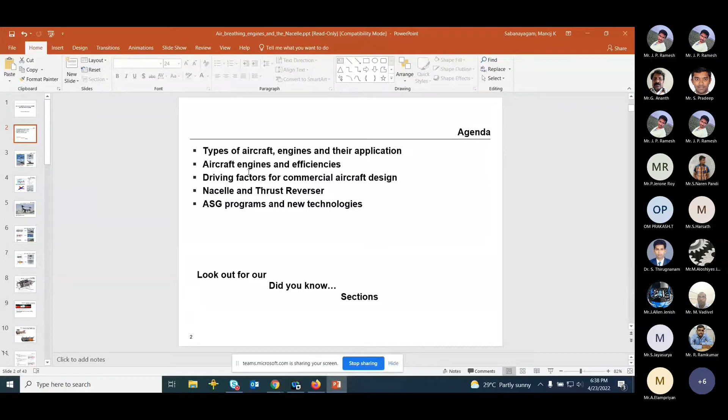Hello. Manoj Kumar, sir, please share your screen. I'm sharing, are you able to see it? Not share... screen is shared but not the slide. Not visible, sir, the PPT is not visible. Once again, share. Okay, now it's visible. Visible, sir, now the slide is visible. Thanks for the confirmation.

Before going into the session, I just want to understand, since you are a mechanical group, how much you are familiar with power plant propulsion systems and how they are covered in your coursework. I'm asking how much people are familiar with propulsion systems, what the power plant systems are, and how energy is extracted, so I can explain things better.

I'm asking how much people are familiar with propulsion systems and whatever has been done in the coursework about electrical systems and power plants, and how energy is derived. Actually, we don't have that propulsion systems course as of now, but we are familiar with power plants, various power plant operations, and related topics.

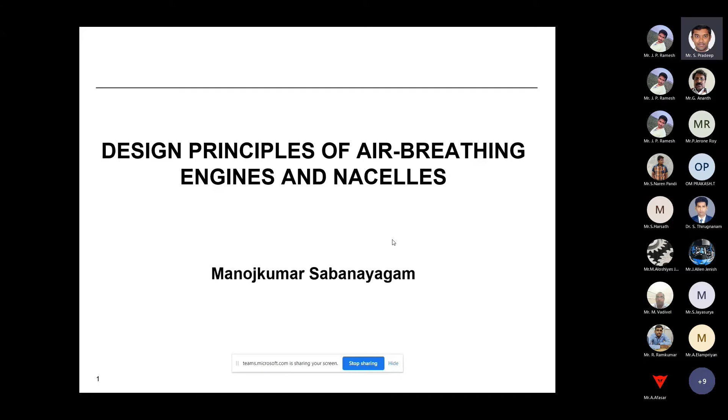Generally, what are the different types of aircraft engines and their applications? In this presentation we'll see the types of aircraft engines and their application, aircraft engines and efficiencies, and the main driving factors for commercial aircraft design. We'll also cover the nacelle and thrust reverser. The nacelle is a kind of cover or cowl to the engines, which also contributes to the thrust. And we'll look at the different technologies and different flight programs we have. So those are all the main topics we are going to cover.

So let's get started. These are the types of aircraft. Also, if anyone has any clarifications or doubts, you can stop anytime and ask for clarification.

We'll start it. There are generally two types, sir. Just a minute, sir. Your voice is a little buffered. Hello, are you able to hear now? Your voice is not clearly audible, there's a little buffer, but now it's okay.

Okay, there are generally two types of aircraft, what we see. It's not just an aircraft, you can say it's a kind of flying machine. How it has been determined is based on the propulsion system.

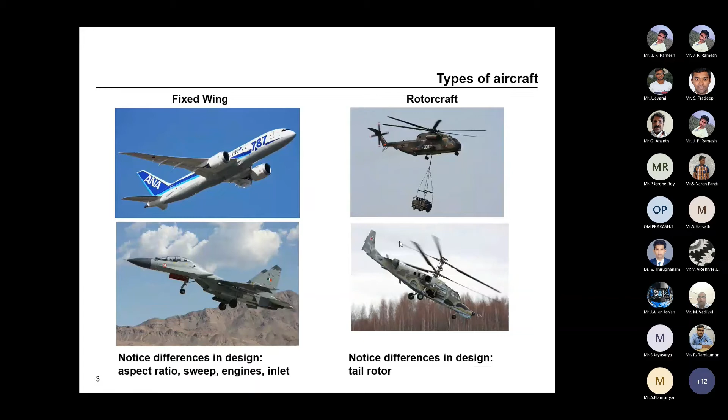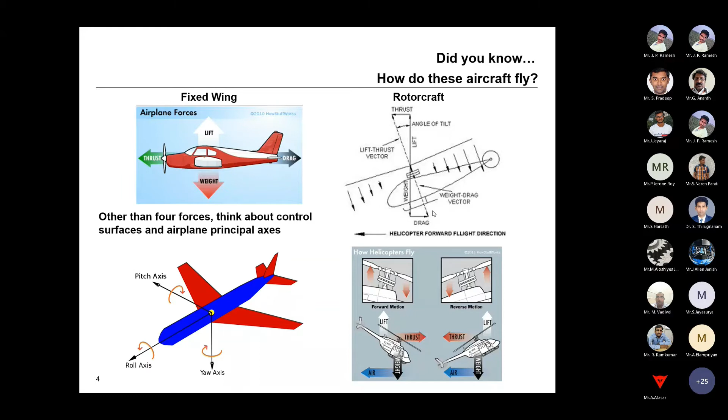These explanations are given just because you people are new to the aerospace industry, so you can have a good idea about how the motion of a flight happens. So this is how the motion is happening. Let me go to the next slide.

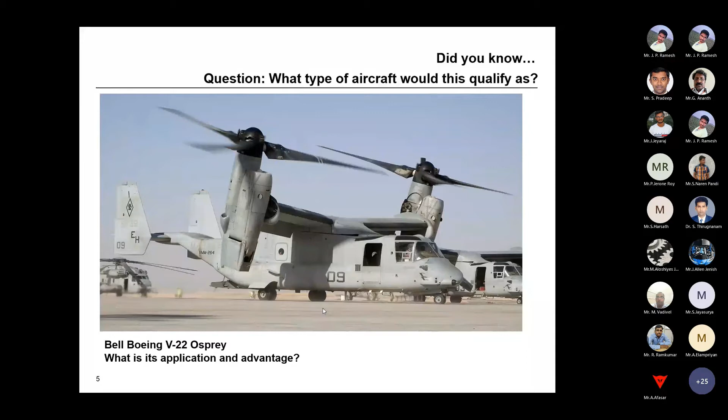So it's a combination of helicopter, rotorcraft, as well as fixed wing. That's the basic application, and it is used for military types or defense types. So going to the next slide.

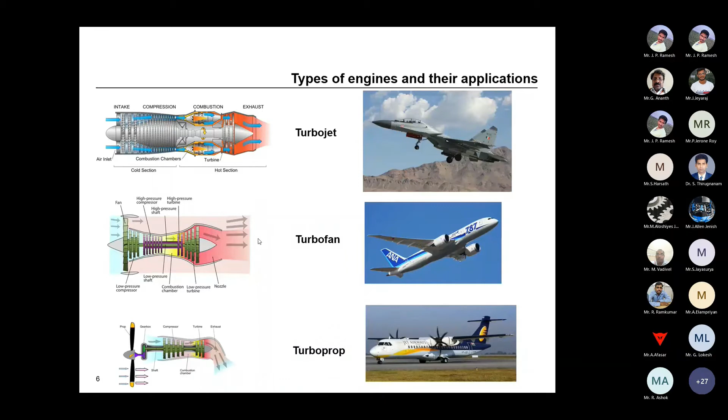So these are the basic types of engines what we see in our aircraft industry.

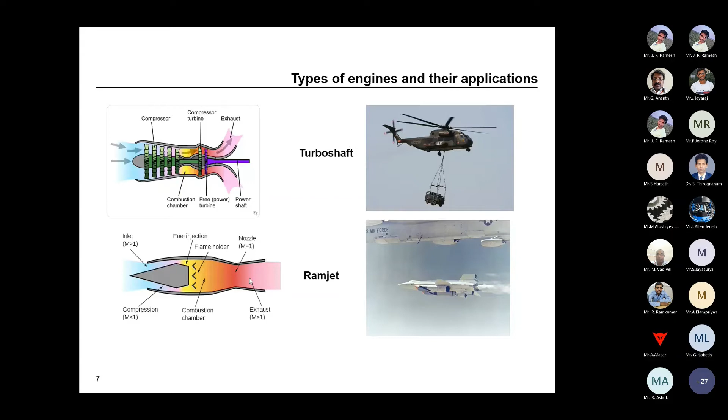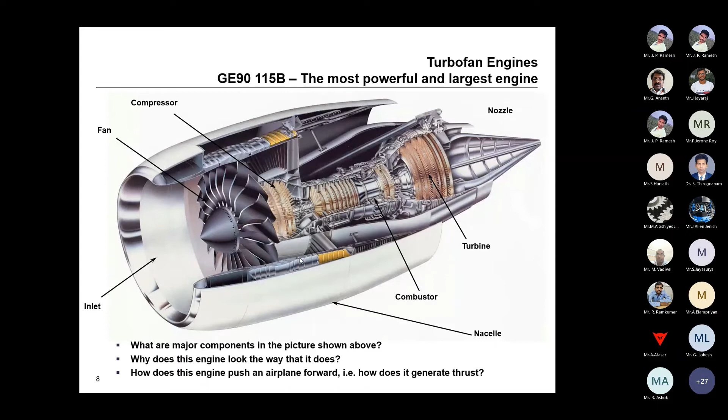These are some basic equations which you have gone through in your coursework: m dot, which is your mass flow rate, times exit velocity minus inlet velocity, plus the pressure difference into the area. I think this is the basic equation for how this propulsion device works.

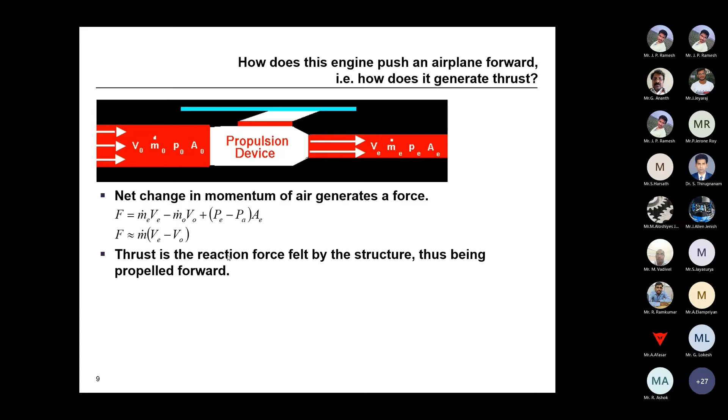Coming to the next slide, what is the major advantage between turbofan versus turbojet? In a turbojet, we increase thrust through the compressor, combustor and turbine, and after that we have an afterburner, which gives additional thrust. The fuel injection happens in the combustor, and again fuel is injected after the turbine blade, which further increases the thrust or velocity of the air passing from the nozzle. To get extra thrust, we have an afterburner device, which works on the same process as the combustor: fuel-air injection.

In bypass air flow, as I said before, there is a core air passing over here, and bypass air flows, and both mix at the nozzle end condition, giving enough thrust. So this is the basic difference between a turbojet and turbofan: the turbofan has a bypass flow, but the turbojet doesn't. Instead, to increase air velocity, the turbojet has an afterburner device coming after the turbine blades. That's the basic difference.

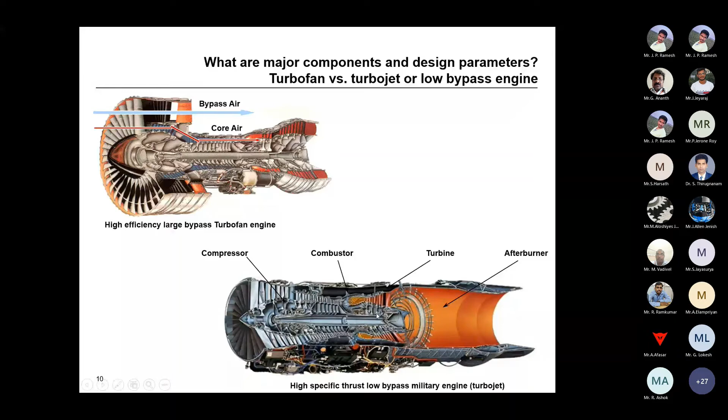Generally engines have three spools. What are spools? There are two-spool and three-spool engines. Basically, it's the shaft connecting the turbine blades and the compressor blades. When you have compressor blades and turbine blades, these two are connected with the shaft.

When you have intermediate stages: low pressure compressor, intermediate pressure compressor, high pressure compressor, and a combustor, and a high pressure turbine, intermediate pressure turbine and low pressure turbine — each is connected by one shaft, called a spool. So a spool or shaft connects each stage: LP compressor to LP turbine, IP compressor to intermediate pressure turbine, and high pressure compressor to high pressure turbine. These three spools adjust the velocity between the blades with high rotating speed.

Accordingly, we will have a higher efficiency in our thrust. So when you increase the stages of these blades with respect to the compressor blades and the turbine blades, we will have a higher efficiency. It will have an advantage of higher efficiency of the thrust to come in. So that's the basic idea behind adding more spools and shafts.

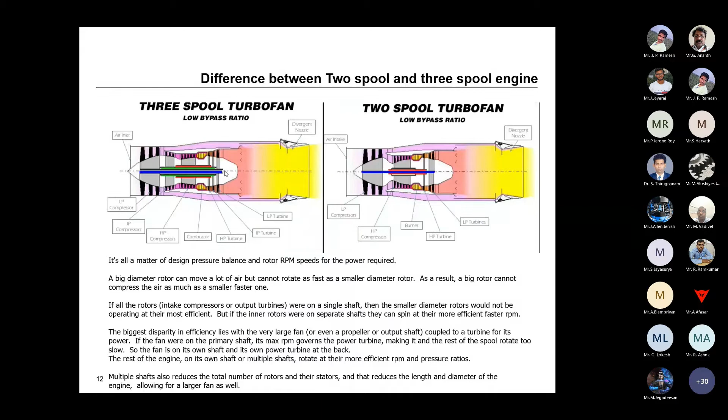So this is kind of like how the evolution of the engine takes place. It started with the first flight, the first commercial flight by the Boeing 707 - that's the first commercial flight in the market. At that time, it started with a thrust of 17,000 pounds. That's the starting point when they designed the engine, and the evolution took place.

This is the bypass ratio, beta, which is approximately 1 at that time, and the evolution took place. After so many years of evolution, by 2011, with optimized and increased technologies and design efficiencies, they were able to achieve around 74,000 pounds of thrust. So that's the increase in thrust achieved over the span of time from 1958 to 2011. And you see the bypass ratio is almost equivalent to 11. It's kind of great - because of new technologies and new inventions, this kind of evolution has happened.

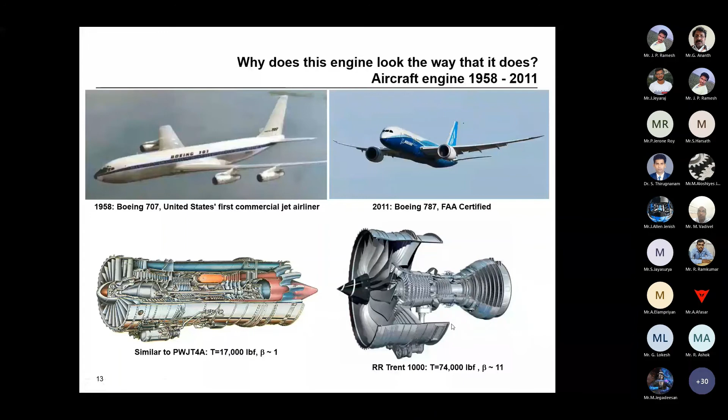Okay, coming to the next slide. So now if you see here, this is a GE CFM56 engine for a Boeing 737. The thrust is approximately 30,000 pounds, and you see the ratio for this flight.

And if you go to the defense aircraft side, what are the expectations for a fighter aircraft? They demand high thrust to weight ratio, and it should have high speed, and the engine should have a small inlet area. But here they should have a large inlet area because it's based on performance - based on how much speed the flight needs to achieve.

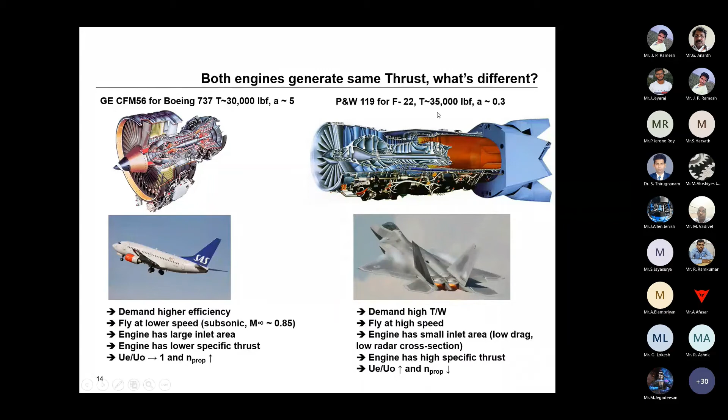And of course, if you see the thrust here, it is almost 35,000 pounds, and we have 30,000 pounds. So coming to the major components in the design parameters for the engines, one is the inlet.

So what is the inlet over here is the streamline. The inlet is a starting portion of this engine, which streamlines the airflow and continuously draws the air into the engine, so it should diffuse to the compressor. The air is diffused under the inlet portion, and then the second stage is the compressor or the fan.

So in the fan, the squeezed airflow will be compressed with respect to the turbofan, and then the compressor blades. So this is basically a compression zone where the compression is going to happen.

Then finally the next is the combustor, where the actual ignition happens. The combustion process converts energy from chemical to thermal energy, and relatively constant pressure is maintained over here.

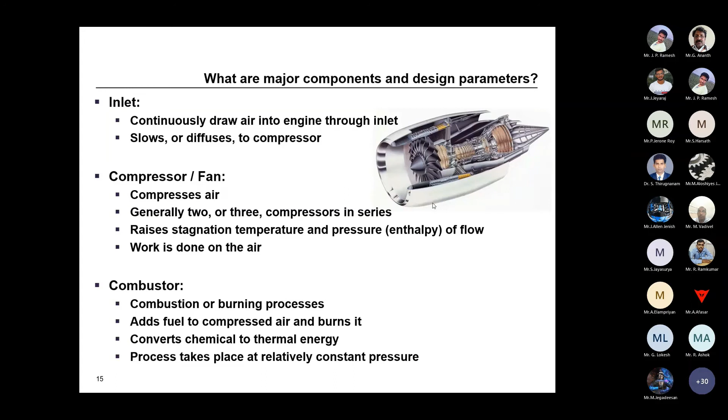And then finally the next stage is the turbine blades. There are 2 or 3 turbines in series, a lot of turbine blade series out there. The purpose of the turbine blades is basically twofold. One is it will drive the compressor blade, and second, it will also increase the velocity of the air which is driving after the turbine blades.

And then finally the nozzle. The function of the nozzle is to increase the momentum of the air, which raises the velocity of the exiting mass flow. So these are the basic stages of how an engine works.

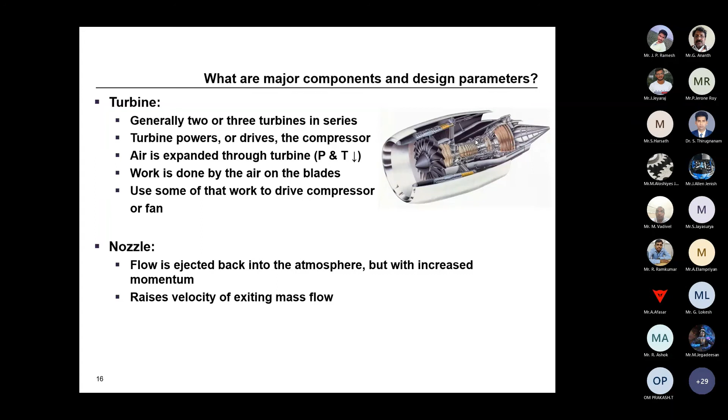So basically it's an air breathing engine, and the same principle is applicable even for the power plant products we see in energy production, whatever it is being derived. The difference is that the turbine blade, compressor, and turbine blade configuration is a little different. But overall, the requirement in design is almost the same for the aircraft and the power plant. So even this turbofan, what we see in flight engines, is also one kind of power plant that we have. So coming to the engine efficiencies, how do you calculate efficiencies?

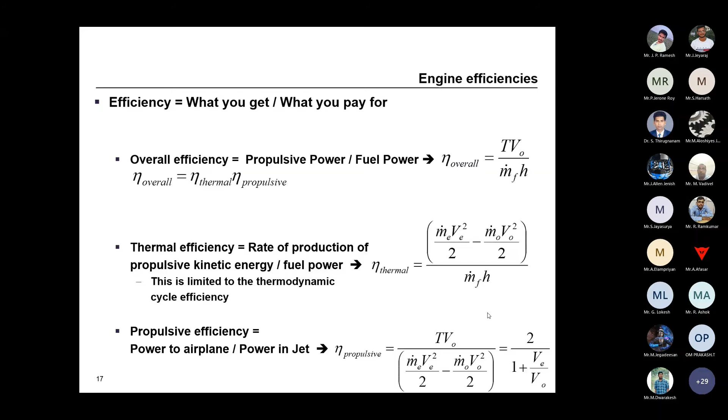So this is the basic graph between propulsion efficiency versus the force by mass flow rate. That's basic information on how it is going to vary.

And so, in the future, what we are going to achieve is ultra high bypass ratio engines with a very small core. So what is the future is we should have more bypass air, which will increase more thrust, ultra bypass. So that design is going to be coming in the future generation.

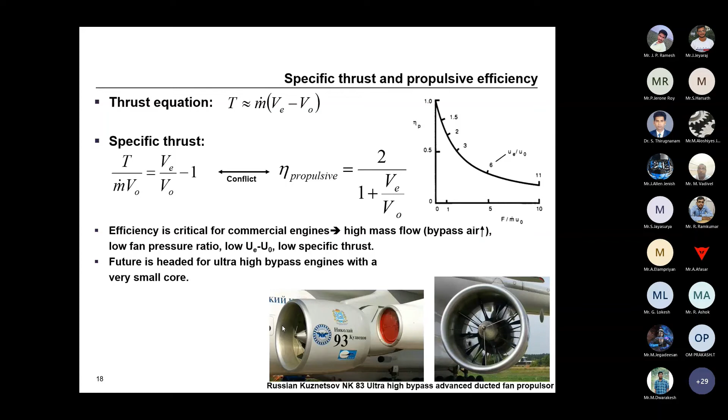Okay, this is how the efficiencies of the engine type system work. You see as speed increases, the propulsion efficiency of the turbojet is lower. But when it comes to the turboprop, once the velocity increases, it drops out. But if you go to the high bypass turbofan and low bypass turbofan, it's intermediate, so it will satisfy both turbojet and turboprop, gradually increasing with airspeed. So this is the basic difference in how efficiency plays around with respect to each type of engine.

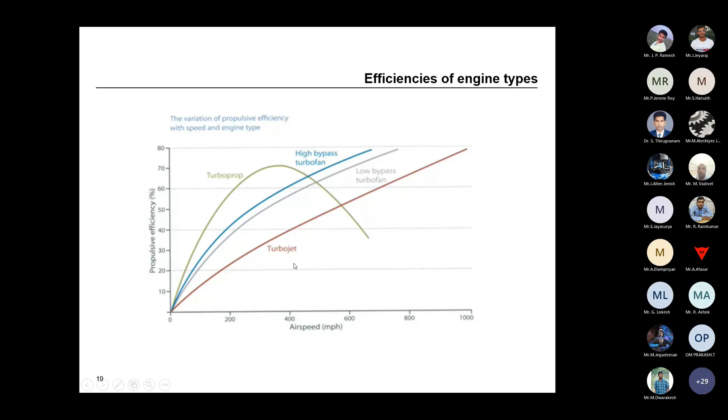Okay, these are some of the engines used in aircraft, and also the bypass ratio is given. Rolls-Royce Snecma, which is used in the Concorde, and Snecma is used in the Dassault aircraft, and Pratt & Whitney. Pratt & Whitney also manufactures small engines, and it has been used in F-16, F-15, which are fighter flights, and General Electric F404 is also used in a lot of fighter aircraft, and Eurojet and Klimov.

And Rolls-Royce Trent 1000 is used in the 787, and accordingly the bypass ratio has been distributed where it has been exactly used. So this kind of evolution has been used, it's what airliners demand regarding which engine to be fitted. So airliner customers have the option to choose their engines. Accordingly, they choose which engines they require based on efficiency and fuel consumption, specific fuel consumption. So that option is given to the airliners, and they pick up the engine requirement which they need.

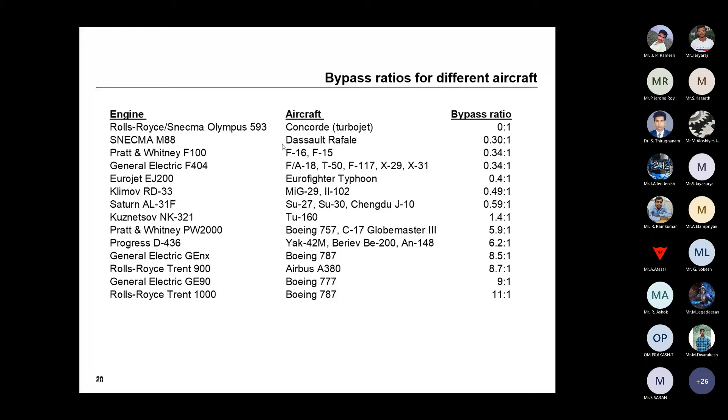Coming to specific fuel burn. Ultimately, everybody's requirement is fuel, which is the largest component of operating costs in airlines. So they are now turning to various fuel saving measures. How do they save fuel?

They have come up with a new technology called GTF, which means geared turbofan. In this, the compressor blades and turbine blades' speed is operated with a gear mechanism fitted in the engine. The gear adjusts the rotating speed of the compressor and turbine blades, giving better fuel efficiency. This cuts fuel burn by 15%, a significant savings in fuel efficiency, using the geared turbofan.

Next is lighter structures. They have used composites in the engines to reduce weight. Once the weight is reduced, the fuel efficiency increases accordingly.

Next is aerodynamic upswept wingtips. Using these wingtips, fuel efficiency increases because they reduce drag. They have sharklets and the 737 blended winglets. There are a lot of winglets, as you see at the tips, which are used to reduce drag.

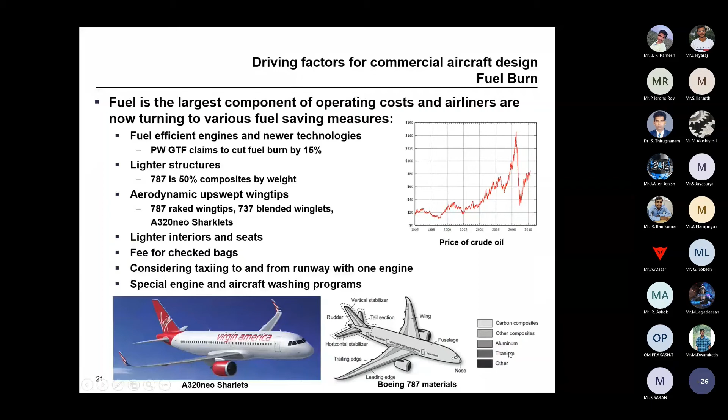Coming to engine noise. Engine noise is one of the major issues in engine manufacturing. Once the engine noise is higher, accordingly more fuel is required, and there is a lot of discomfort for passengers sitting inside. When you reduce the noise, we can increase the thrust significantly. So there should be measures to reduce the noise.

How do they reduce the noise? They use a sandwich core in between, which helps reduce the noise, giving multiple reflections of the noise that reduce it accordingly when it comes out. We have to reflect the noise internally so it should not come out at this point, using the sandwich structure, and there is a cowl made for it.

That's basically the measures they take for reducing the noise. Here you see how noise limits have been restricted based on the number of airports each year.

These details show how, for each year, they are reducing noise through curfews, noise charges, and noise level limits. They have a lot of restrictions at airports to reduce noise during operations, so it's a more important thing to reduce the noise.

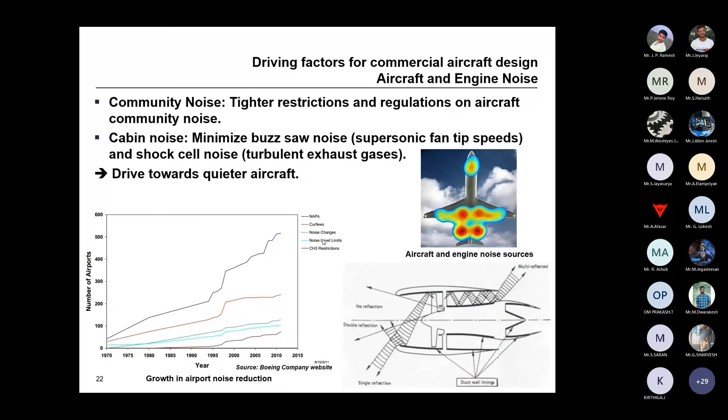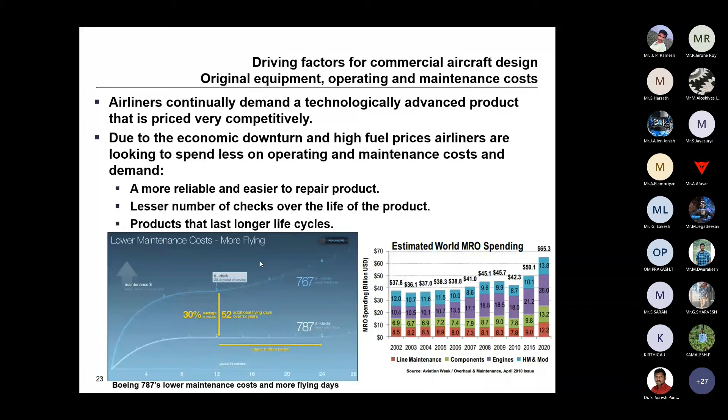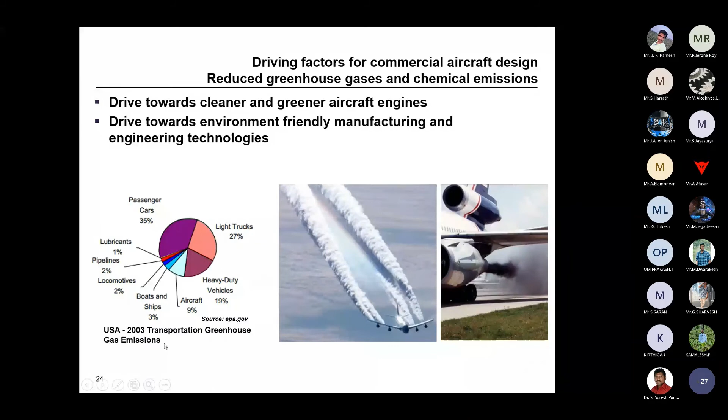So I'll just ask some interesting questions. You see any flights flying there, kind of trails coming out like smoke. Could you identify what all these smokes coming from the trailing of the aircraft are?

Hello. Yeah. Tell me.

So this trailing smoke, are you able to identify why it is coming? I think many people would have noticed this kind of trails in flights in the air.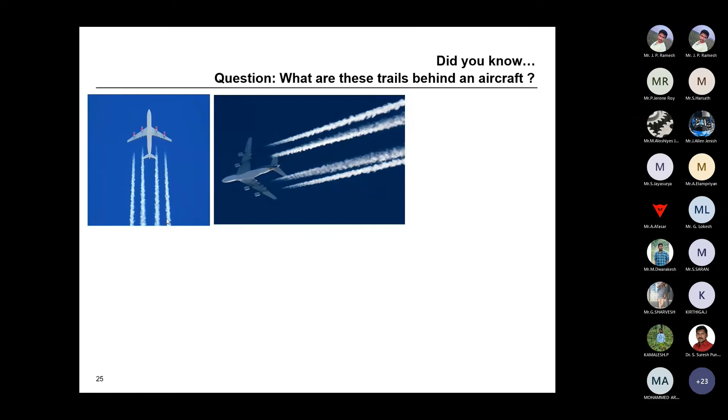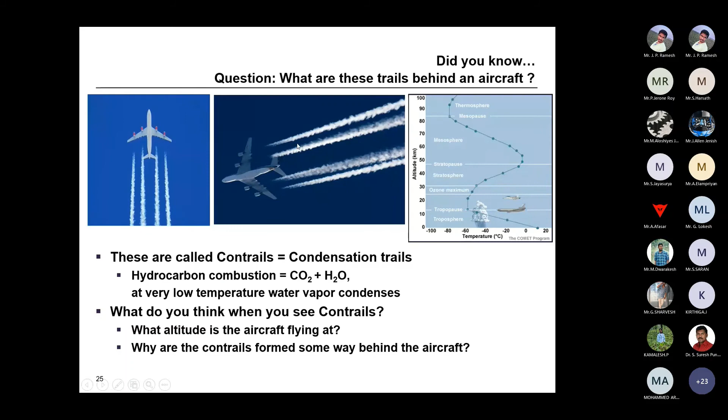I'll say something - this is condensation trails. Why it happens is because of hydrocarbon combustion, when your carbon dioxide mixes with water droplets, whenever there is a smog condition with water droplets in the clouds. When it mixes with this, the condensation trails happen, and it takes some time to form - so till here there's a gap, and after that the condensation happens. So this is basically condensation trails, because of dew drops mixing with the carbon dioxide left out. That's how this condensation trails happens.

Okay, so now coming to... just a second, one second. Hello.

Yeah, you can continue, Manish. So the cowling structure is surrounding the aircraft engine nacelle and thrust. This product, whatever is being seen, is a cowl kind of structure - the nacelle and thrust reversers physically interface with the aircraft engine and pylon. There is a pylon attached to the flight, and there is a cowl which covers the engine. This is one of the major aerostructure products covering the engine.

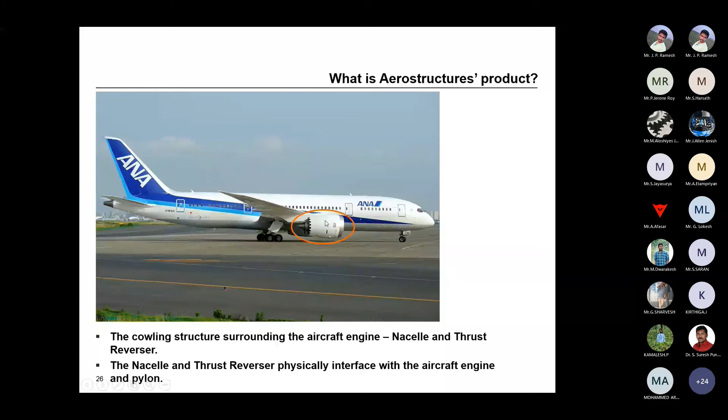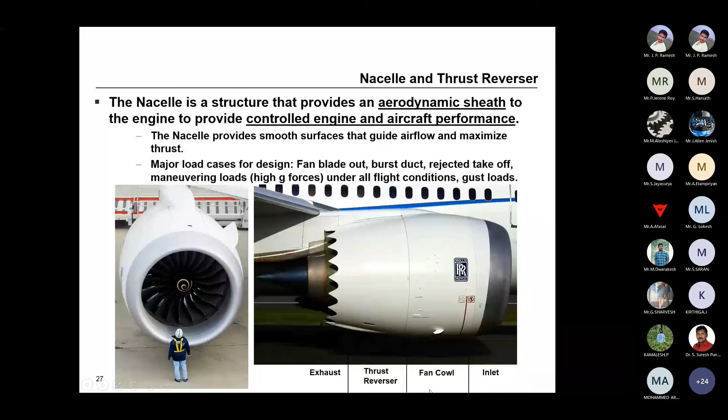So let's see what the cowl actually is. The nacelle is a structure that provides an aerodynamic sheath to the engine to provide controlled engine and aircraft performance. So this is basically a cowl covering the engine, guiding smooth airflow around the engine, and also the bypass flow coming after the turbofan engine. There are different types of cowls - one is the inlet, which is the starting point, then the fan cowl, and the thrust reverser at its location, and the exhaust. So it's an aerostructure product covering the engines.

As you see, this inlet has a streamlined flow, and there's a small component here. This is because in the inlet there is a kind of ice formation that happens. To condense the ice, they use the temperature of the thermal air traveling over there, which condenses the ice, and because of this there is a flow of ice in vapor form coming out of the nacelles. So this is because of the ice formation on the engine lip.

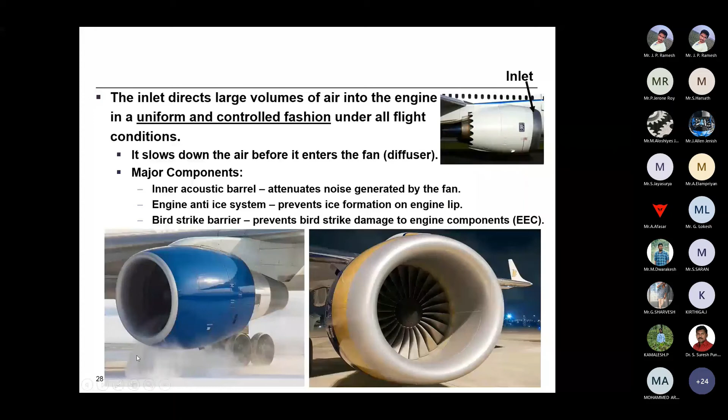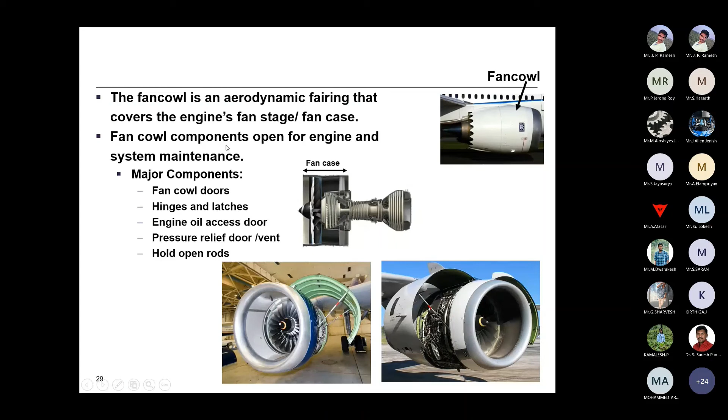So these are all the components: fan cowl doors, engine oil access doors, and pressure relief and hold-open rods. These hold-open rods are used whenever maintenance is being done, so the fan cowl can be opened for engine maintenance. There are also hinges and latches which close the door. So these are the types of aerodynamic fairing which have the major components.

Coming to the thrust reverser, its purpose is that once the flight has landed, it should have a lower runway length to stop the flight. So they open up the thrust reverser, which reverses the bypass flow air so the thrust doesn't go in the original direction but to the opposite side, which increases drag so that it stops within a shorter runway length. That's the purpose of the thrust reverser in the engine cowl, to reduce the landing distance.

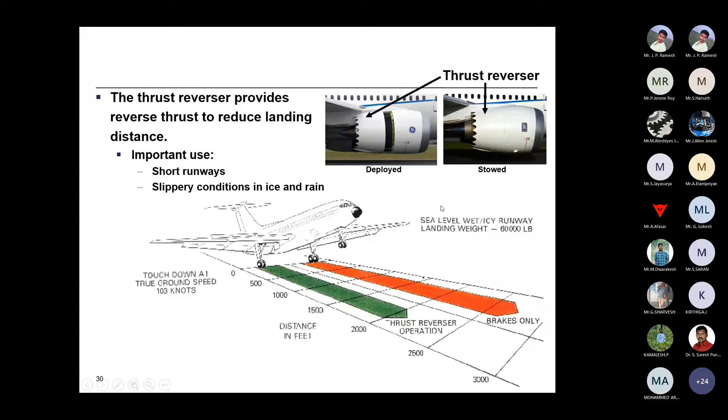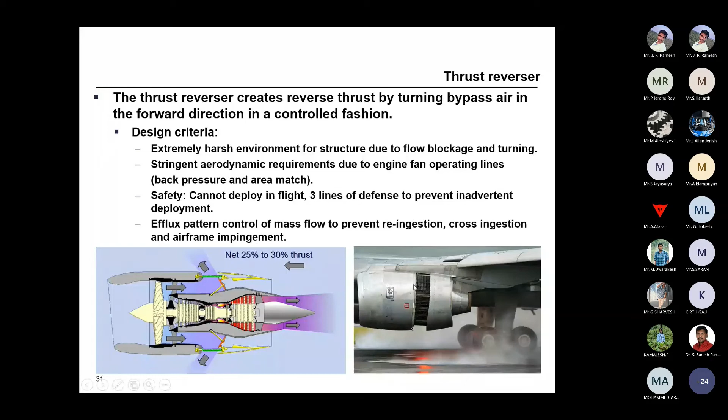The thrust reverser creates reverse thrust by turning the bypass air into the forward flow direction. As the engine bypass flow goes here, once the thrust reverser is deployed, a blocker door blocks the air and creates reverse thrust. It's used when you want to stop the flight during landing. There's a lot of aerodynamic design required to have a better reverse thrust flow for this.

Finally, the exhaust. This is the portion which has the bypass flow air, and the design is a kind of corrugated design meant to have aerodynamic smoothing, called chevrons. This smoothness ensures that the engine mass flow going outside has lesser drag for a better aerodynamic design. To meet that, they have chevrons designed into the nacelle.

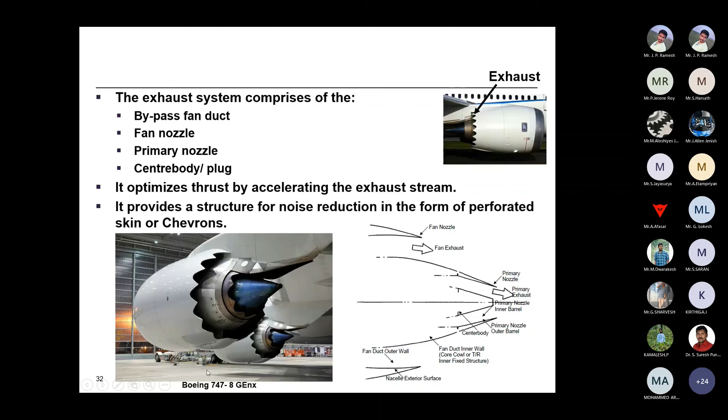Coming to the engine mounts: the engine is mounted over a pylon, connected from the pylon to the wing. This is the actual link rod holding the engine—without this link rod, the engine would drop down. So it holds the engine, and from here the pylon structure goes to the fixed structure, with the whole engine fixed on the pylon structures. This is a very primary structure, designed under fail-safe and damage tolerance principles. It's a very critical design with a lot of caution taken while designing the pylons and engine mounts.

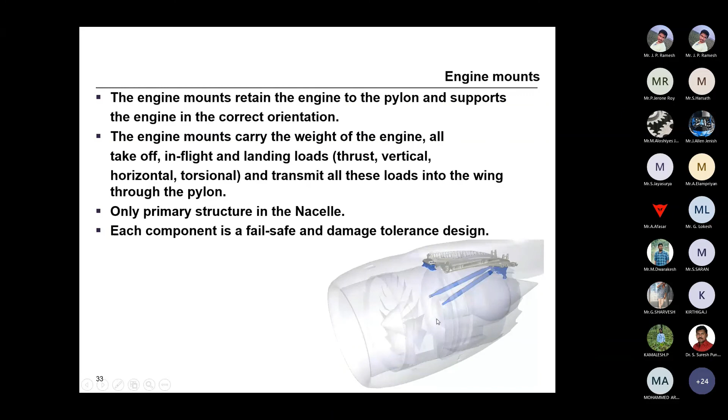Then the engine build up: this basically includes the fuel lines, cable lines, and electrical installations going around the engine. All these designs are controlled by the engine build up, covering systems like pneumatic systems, fuel systems, electrical systems, and power generation. The design criteria cover heat resistant metals, pressure proof and burst requirements, and vibrations are checked, including core engine vibration levels for all these installations.

Even a small failure in the fuel or electrical lines leaking out would be a big trouble for the whole engine design. So it has to be checked, tested, and designed accordingly so there is no leakage. These are all very critical installations that need to be taken care of in the design as well as the installation and assembly level.

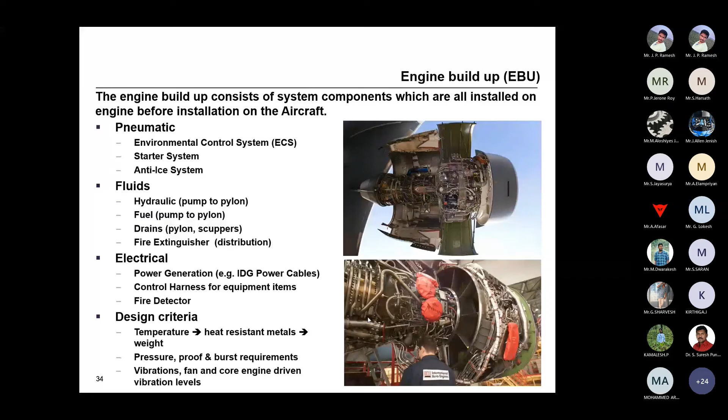There's also an APU, auxiliary power unit, at the back end of the flight. It's used when your engines are not functioning properly during flight conditions, so they need an alternate option. This auxiliary power unit is turned on if the engines fail, to provide enough extra power. This is only used during emergency conditions, not all the time. Whenever the flight engines are not functioning, they use this alternate power, the auxiliary power unit, placed at the end of the flight section.

There's also a simple engine mechanism which has an inlet and a lot of compressor blades.

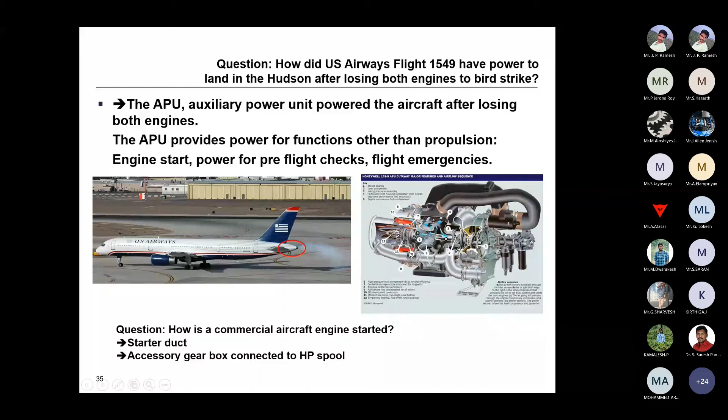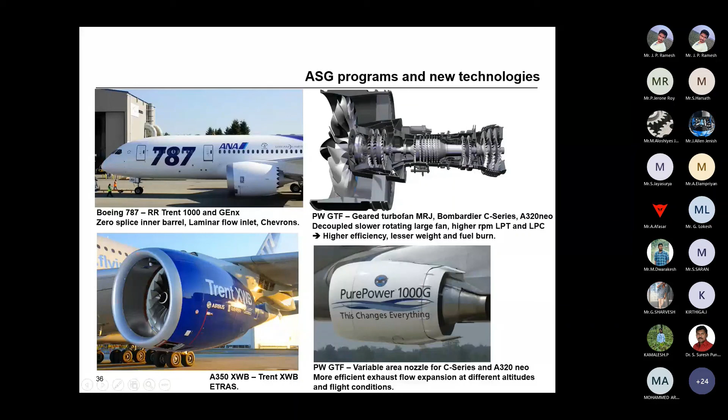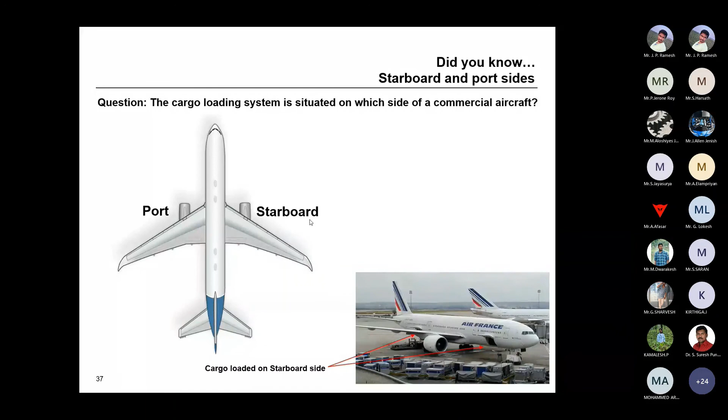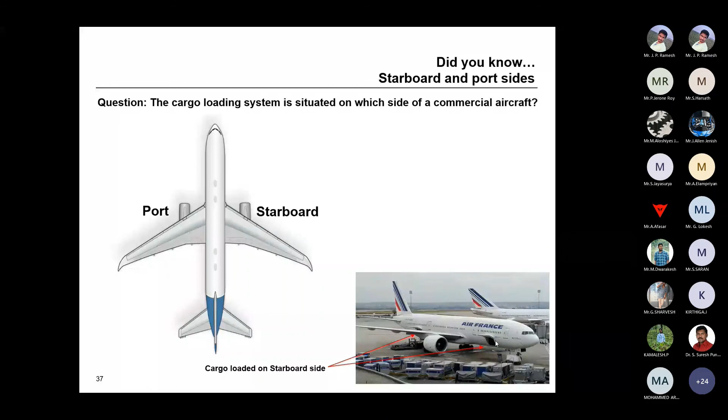So coming to the next point, this shows how commercial flight sides are termed: port and starboard. The left-hand side is called port, and the right-hand side is called starboard - this is common terminology used in flight systems maintenance. The cargo is loaded at the starboard side, the RHS, where passenger luggage is mounted.

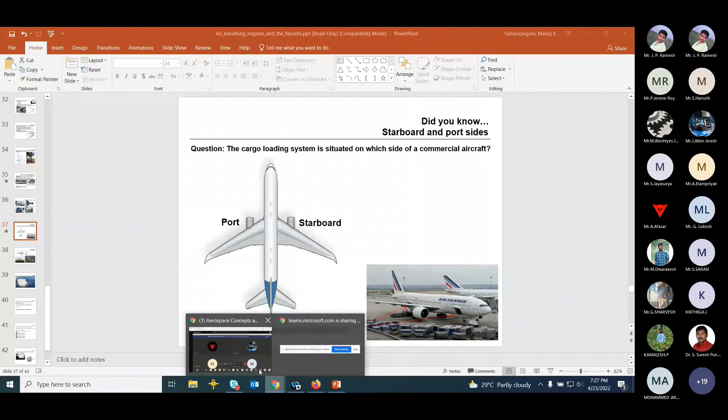Sir, Chinnan sir, can you check? Yeah, am I audible? Yeah, audible, sir.